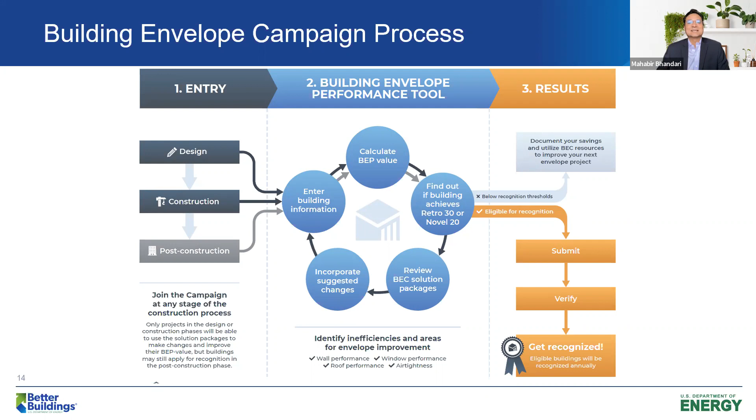And if for any reason you are close to it or you have not achieved it or you want to exceed it, you can review our building envelope campaign solution packages or contact us for any other technical advice. Once you do that, you can incorporate these changes and submit the building back again, or update the building submission - you don't need to submit it again. Once you are done with that part, if you think you are ready for submitting your building for award recognition, we'll verify, ask some information, and of course you will get recognized. So that's all, that's how simple the process is.

I just introduced these goals and processes, but the question is, how do we achieve these goals? The short answer is, with broad industry engagement, with supporters and participants in the building envelope campaign. Supporters are those who are really invested in the outcome of the campaign and see a need for transformation in this space, but who don't necessarily own or manage the building themselves. Supporters will also have access to great resources, and they will spread the word and encourage their stakeholders to participate in the campaign. Participants, on the other hand, are the crux of the campaign - they are the building owners or managers, or contracted by building owners or managers, like their reps. They are the ones who will be implementing these technologies. They have access to all our resources, technical expertise and tools, and we can help in evaluating or recommending the solution, and you will gain recognition for your leadership role once the whole process completes.

A quick look at a glimpse of our recognition tiers and categories for the campaign. We have a retrofit category and a new building category.

So if you're building, you get 30% better than your current building in terms of envelope performance, or 50% better, then you get Retro 30 or 50 awards. In new construction, if you go 20% or 40% above the current code, like ASHRAE 90.1, you'll be recognized for that. We have a role model category where you've achieved one of these goals, but went beyond and did some technologies which take you way above these two categories.

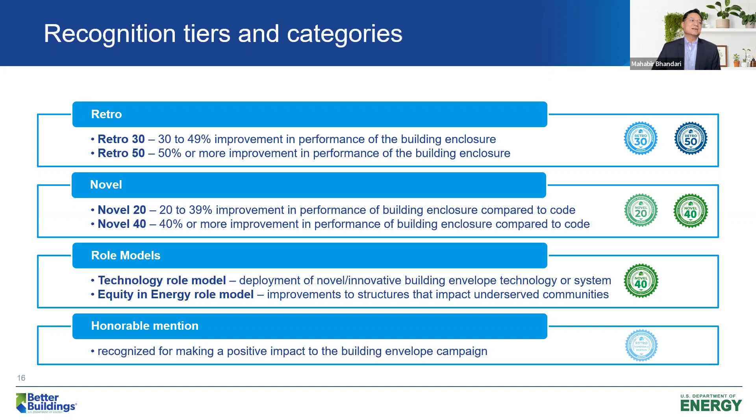In envelope categories, our usual suspects like increased insulation, air sealing, and windows. But this time we also have secondary glazing and cool roof technologies. This year it's a reverse trend from year 1 - we only had one new construction, and I think looking at what we are going through for the last couple of years, that kind of makes sense here, why there weren't that many new constructions.

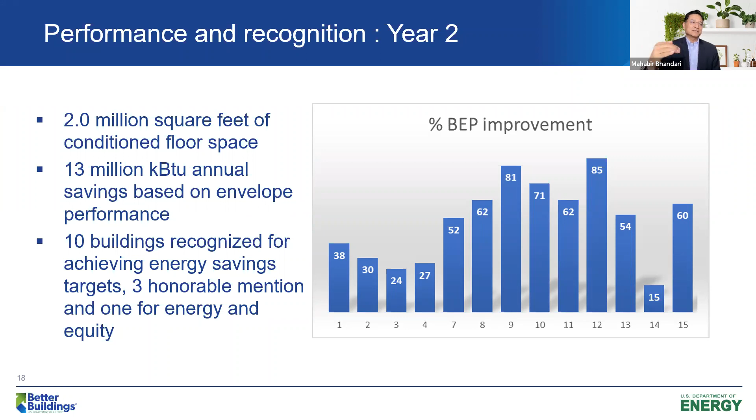Next one, please. So a quick look at what the success story here is. The campaign touched 2 million square feet of conditioned floor area and 13 million kilo-BTU annual savings based on thermal performance alone. Envelope performance improvement ranged from somewhere from 15 to 85%. 10 of these 15 buildings achieved recognition, and 3 of them we put in the honorable mention category - like I mentioned, they were very close but couldn't reach those thresholds.

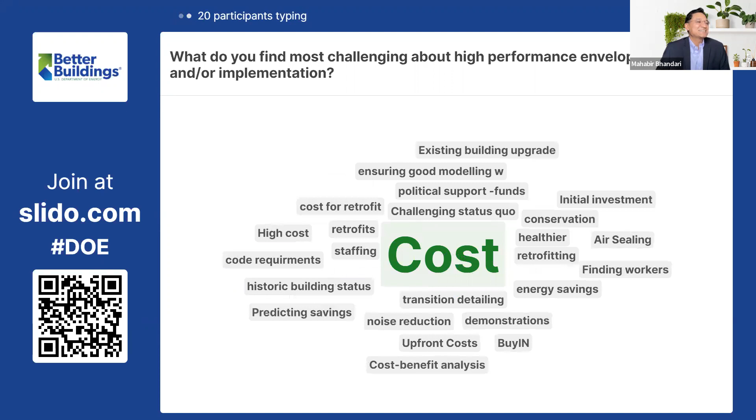Cost seemed to be the most impactful. Please keep introducing answers. Cost is really at the top of the list. Existing building upgrades also coming up, but we saw a few examples here where people really implemented them, and you'll hear from a couple today. We'll also be putting more of that information out later. So political support, funds, windows also coming on top, and upfront cost is also another challenge.

Maybe we can ask some of these questions to our participants who implemented these technologies.

So other than cost, challenging status quo - yeah, I think that's what we recognize in terms of the envelope campaign, that this is one of the areas where it's really difficult to do implementation. Looks like a few more people are typing, but this is really important for us to know what some of the challenges are and how we can help as a building envelope campaign team, or like Jeff's team at DOE can help with these things. Long payback of ECMs, yes, that's one of the challenges for the envelope.

So the cost, challenging status quo, long payback of ECMs - of course everybody wants to say money, upfront cost, carbon and cost balances are some of these. I think we are done with the poll.

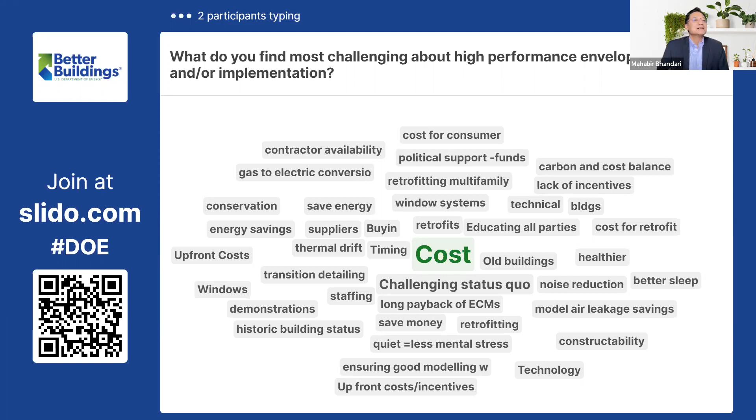So when the poll closes, I will introduce our second speaker today, Eric Turan. He has spent over 30 years in design, construction, facilities, and property management operations for healthcare facilities and hospitals along the East Coast. In his current role, he serves as Director of Facilities Service for the North Carolina Department of Environmental Quality, overseeing facilities and property management operations for a portfolio of 30 sites across the state agency. Eric, please take it away.

Thank you for inviting us to share our work on our submission to the building envelope campaign with the group today. Especially after seeing that last poll, I think some of the things I'm going to talk about check a lot of the boxes that people had concerns with.

A little bit about North Carolina Department of Environmental Quality: it is the lead stewardship agency for the protection of North Carolina's environmental resources. The agency administers regulatory programs designed to protect air quality, water quality, and public health. We also work to advance an all-of-the-above energy strategy that fits North Carolina's needs.

So our submission was for 4401 Reedy Creek Road. This building is one of 3 buildings at our Reedy Creek Lab campus in Raleigh, North Carolina. This building is 18,000 square foot. It was built in 1989, opened in 1991. This building is home to our Division of Water Resources Biochemistry Laboratories.

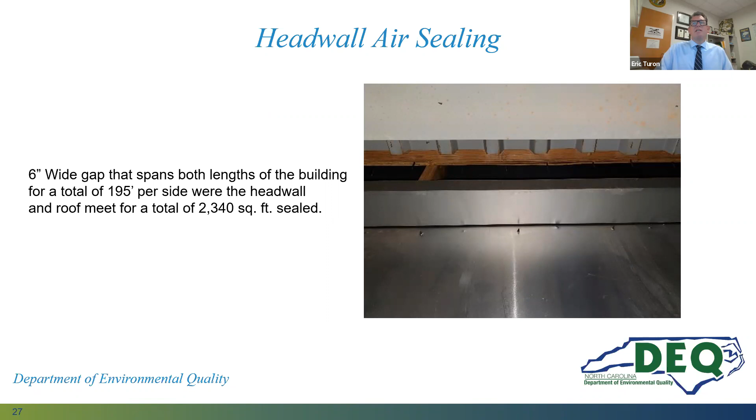So in today's building designs, we like to make our buildings tight for energy efficiency. Back in the 80s, the design approach was that buildings needed to breathe, and we needed to design and build them with a lot of ventilation.

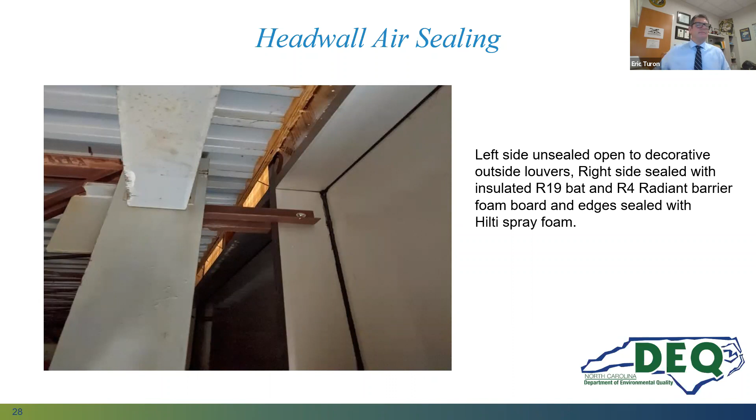And here you can see the outside decorative louvers, above the ceiling where all the equipment is located. And here you see the final product, totally airtight and air sealed.

How effective was this? We finished a $1.5 million campus HVAC project that included a controls upgrade and new VAV boxes. We had 4 antiquated control systems that did not talk to one another, so we combined them all into one system with building analytics. Before this, we still could not achieve an unoccupied set point of 67 degrees for after hours, nights, and weekends in winter - we consistently hit 62 to 63 degrees. When we finished this project midwinter, we were hitting 67 to 68 degrees on mornings where temps were in the high teens to low-mid 20s. For North Carolina, that's pretty cold.

Next slide, please. Can you go back? I think we missed a slide. Something got jangled up. Okay, so leave it there - a couple slides are missing.

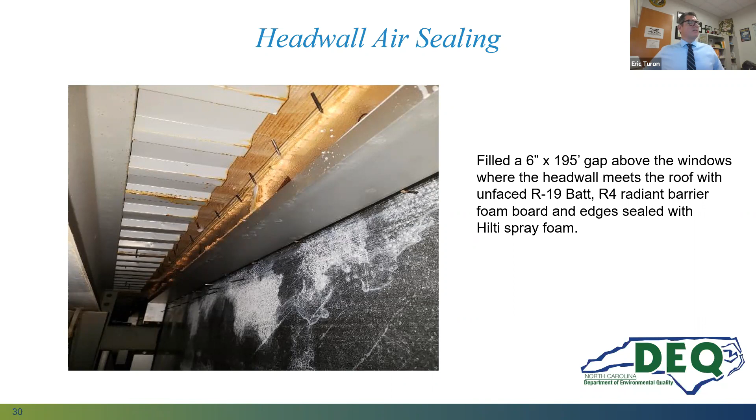Next slide, please. Somehow this got jumped around. Let me find my notes on this here.

We had a project to replace the roofing system on 3 lab buildings. The design engineer wanted to go back with the existing dark colored modified bitumen roof system. We elected to go with a white reflective PVC roof system with reinforced Kevlar seams. The system had the same warranty as the modified bitumen system and was 25% less expensive. We have these roofs on an annual preventative maintenance schedule to clean and maintain their reflectiveness.

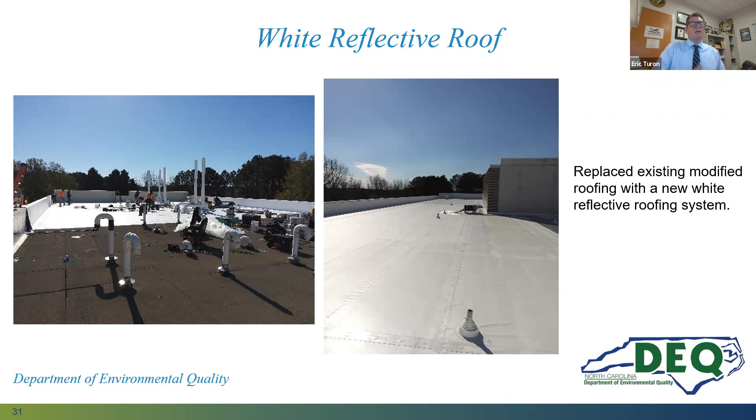There are some examples of exhaust fans and lab hoods that were penetrating through the roof. Next slide, please.

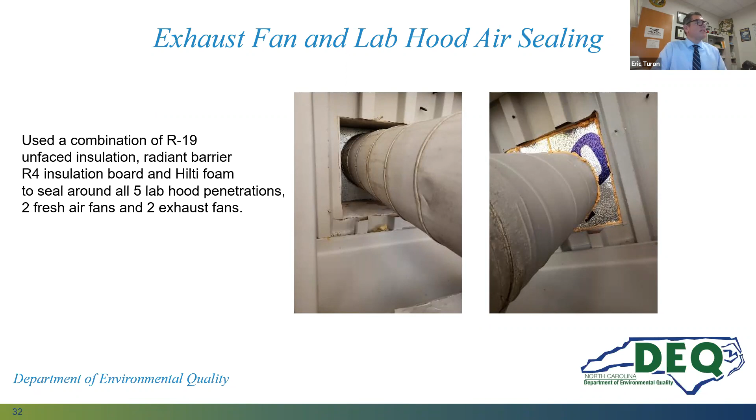And there's some of the finished product, before and after. Next slide, please - this project was very interesting.

This one involved outlets and door sweeps. In the spring during pollen season, our labs would ask us to check the HVAC system because there was so much pollen dust over their lab equipment, and pollen was making its way into the lab samples, causing lab techs to have to factor out the pollen in the tests. After evaluating the HVAC system and finding all systems operating as designed, we took a deeper dive into the building envelope and found that all the outlets along the exterior walls had 1/2 inch to 3/4 inch gaps around the outlet boxes, with mass amounts of air coming through and around them. So we sealed all those up. Our labs run in negative pressure with all the lab hoods, so we're constantly pulling in unfiltered, non-conditioned air. We sealed up 174 outlets and added 25 door sweeps to all the exterior and lab doors.

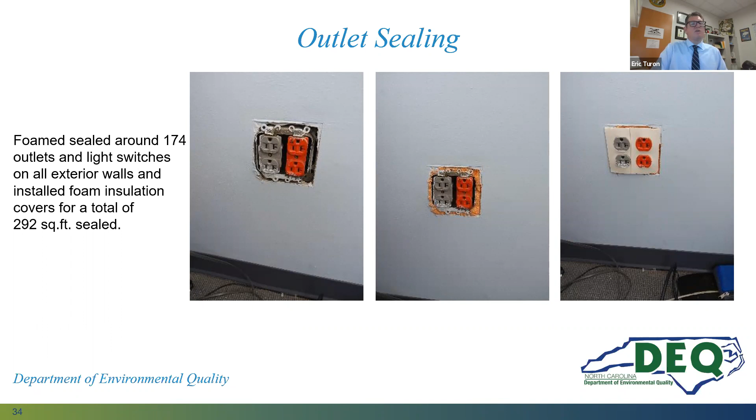Next slide, please - there's some door sweeps.

Once we finished that project, the labs soon reported they no longer had to factor out pollen in their lab samples and testing. So not only did we fix the non-conditioned air entering the building 24/7, but we improved air quality as well. Next slide, please.

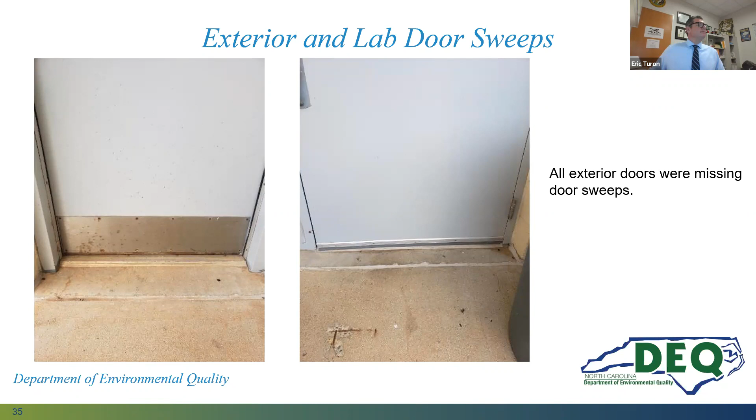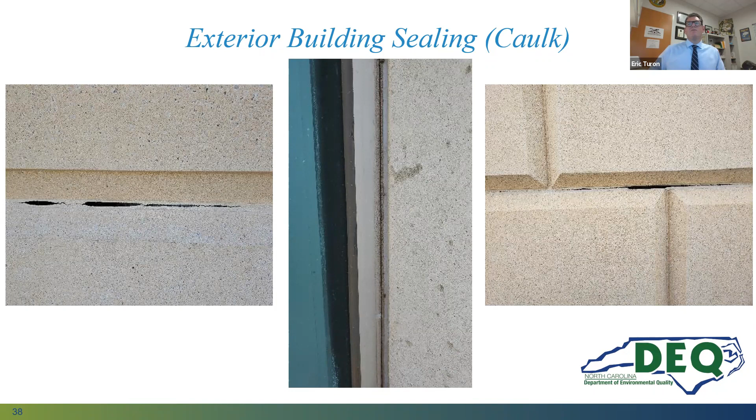Next slide, please - here's some finished areas. Next slide, please.

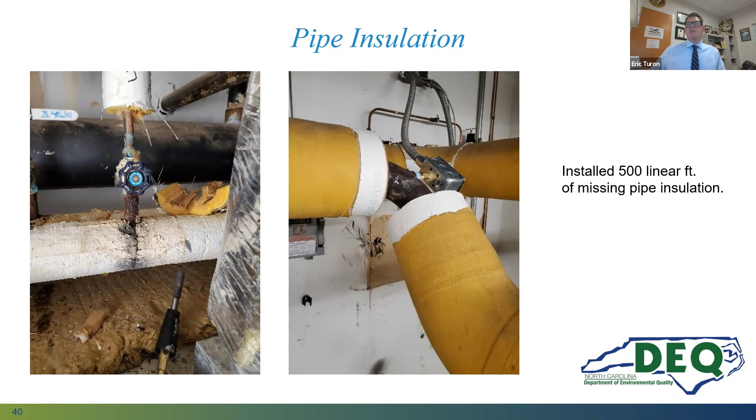So some other indirect things that we did on the building envelope, part of our HVAC project: we noticed we had a lot of missing insulation on pipes and valves. So we replaced over 500 linear feet of missing pipe insulation.

Our mechanical and sprinkler riser room have this funky all-glass south-facing design. We installed radiant barrier insulation over the windows and literally dropped the temperature in the summer months in these rooms by 45 degrees.

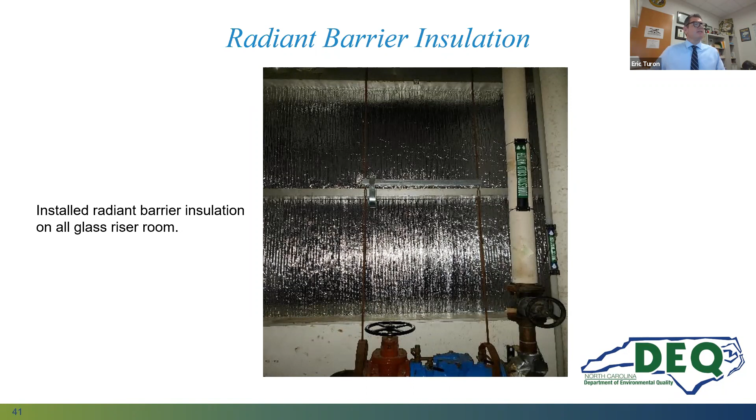We wrapped and put timers on all our electric water heaters. And we inspected our existing ductwork and sealed it as needed.

On a test and balance of our HVAC system, we found 75% of the return and 25% of the supply vents that should be open were not. We have 30 years of different technicians and vendors going up in the ceiling, making modifications and adjustments. In that time we've had lab functions that have changed, labs that have moved around different parts of the building. So it's definitely worth doing that internal self-commissioning of your ductwork and your vents.

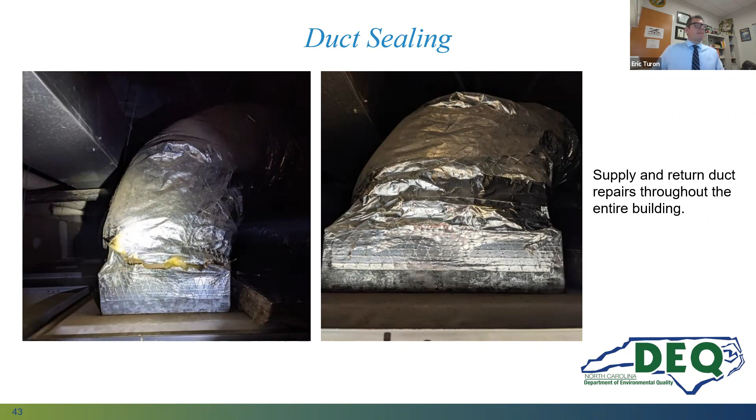Here's some more air sealing or duct sealing we did.

We also made repairs to our energy recovery system that was inoperable for about a decade. We rebuilt that.

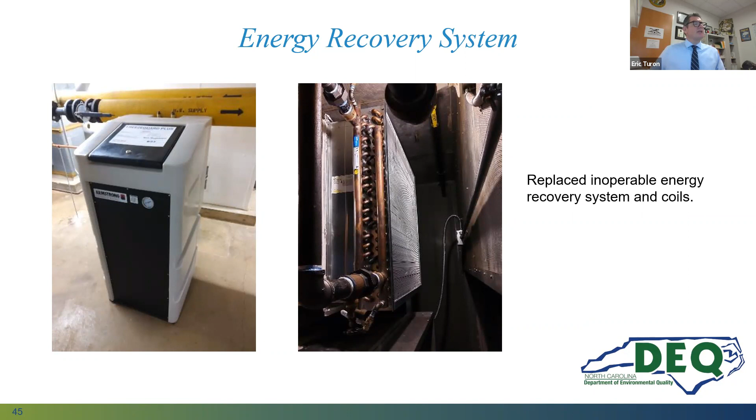We converted our entire campus from T12 lighting to LED through a grant with our power provider, Duke Energy, and the state's energy office.

We replaced our HVAC control system from pneumatic to DDC, and now have the capability to do setbacks. What most of these projects have in common is they all reduce heat load. If you have a tight and efficient building envelope, your equipment's going to run more efficiently, you're going to have better air quality, your occupants will be more comfortable, and you will save energy and money.

So working with the folks from Oak Ridge Lab, we've come up with the following from our work.

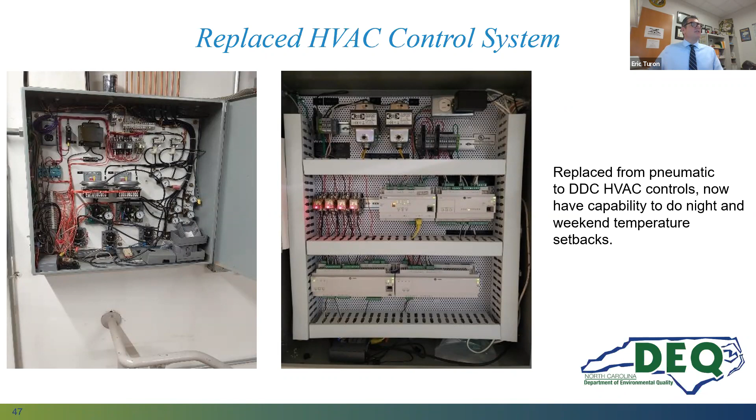We've calculated we've sealed up approximately 2,632 square feet, which was equivalent to 6.5 semi-trailers.

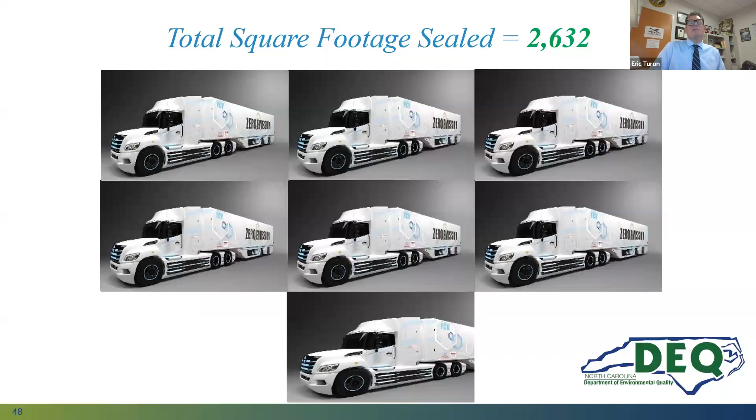Our energy reduction was around 25 to 30%. And don't forget, labs are one of the biggest energy users out there. Our current energy cost is still relatively high because we're a lab, at $3.35 a square foot.

So hopefully we're able to give you some ideas today to think about for your facilities. A lot of our projects were low cost to perform and were able to be done by our in-house maintenance team. Thank you for your time today.